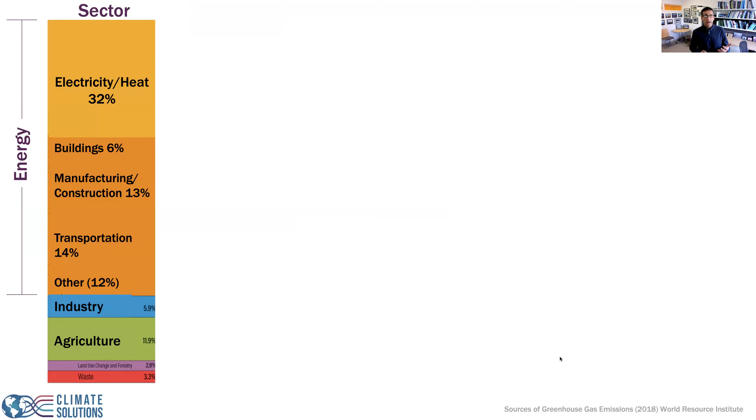So let's start again with this framing diagram that's been in both sections of this series. What I'm showing you here are the sources of greenhouse gases to the atmosphere that are causing climate change. What you can see is that our production of energy writ large is about 75% of all the problem. That diagram then flows through to where this energy is being used.

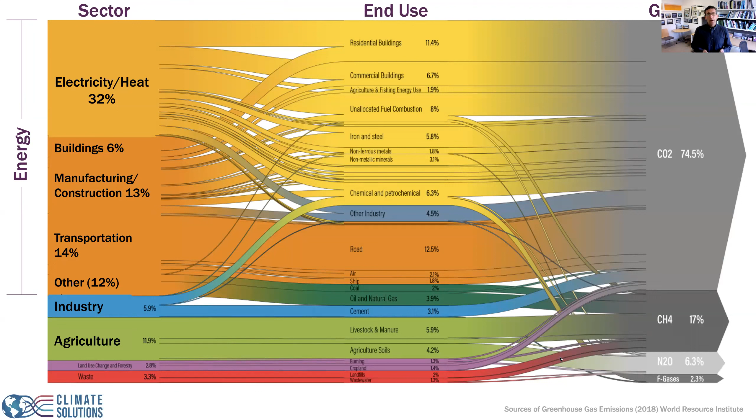So in residential buildings, in commercial buildings, in agriculture, in road transportation, et cetera. And then out the right-hand side of the diagram tells you which greenhouse gas is being produced, and together those are causing climate change.

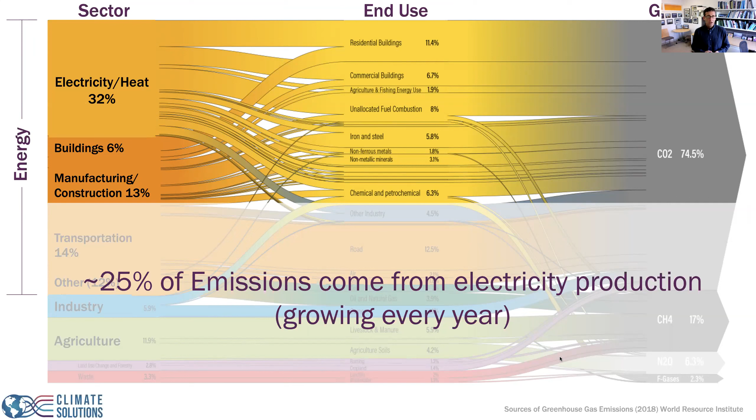The bottom line from this diagram for today's talk is that roughly a quarter of emissions come from electricity production. When I first recorded these videos, electricity was the biggest emitter. Of course, right after I recorded them, transportation came in slightly ahead of electricity in 2022, but it doesn't really matter for the talk because transportation will soon be part of the electricity sector as we electrify our vehicle fleet, and we'll talk about that in just a minute. So electricity is a huge producer of greenhouse gases.

And the reason for that is that we produce electricity mostly by burning coal and natural gas. So fossil fuels make up roughly a little over 60% of the total electricity mix. And non-emitting sources, which include nuclear fission, very prominent in some countries and not in others, hydropower, wind, solar, and other renewables, make up the other roughly third of electricity production.

There are a couple other things I want to highlight about this image before I move on. The first is that in the year 2000, fossil fuels made up 64.8% of electricity production, and 20 years later, they make up 63.3%. So just over a 1.5% drop.

Now, the total amount of electricity production has gone up. Renewables have really come on board in great numbers, but as a percentage, we're still using mostly two-thirds fossil fuels to generate our electricity. Despite all the press about how fast renewables are coming online, as a percentage it really hasn't changed very much at all. If you look at low carbon sources, it's gone up about 1.5%, essentially.

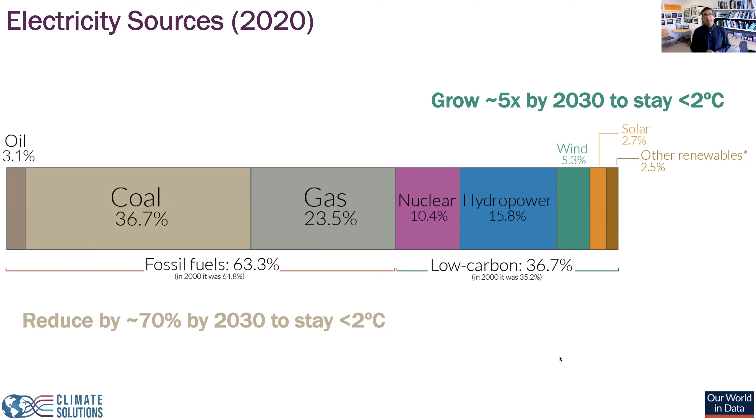Nonetheless, if your goal is to stay below 2 degrees Celsius, what has to happen? In order to stay below 2 degrees Celsius temperature rise, we need to reduce our use of coal, oil, and gas in the electricity sector by about 70% in the next 7 years. And we need to grow the share of renewables, or non-emitting sources of electricity, by about 5-fold in the next 7 years.

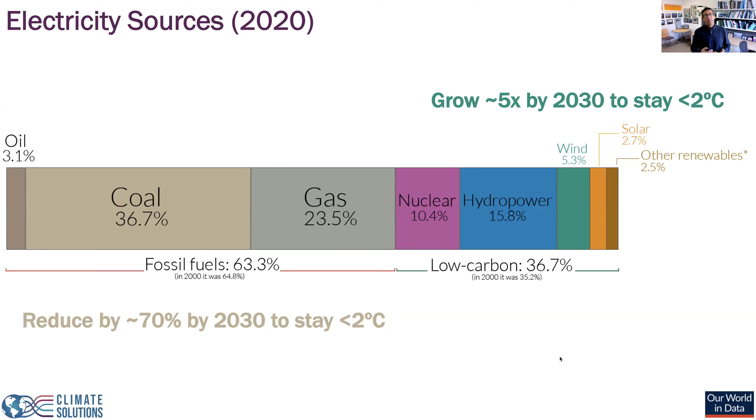So this is no small challenge, and one that we are racing to achieve, because 2 degrees, that trajectory, is at the outer bounds of what is readily imaginable in terms of a climate future. Any warming beyond that really starts to become much more uncertain in terms of the impacts, because they grow so much bigger.

If we continue to emit at current rates for the next decade, 1.5 degrees Celsius will be in the rearview mirror, and 2 degrees Celsius will be very hard to stay below.

This is important for electricity, because even if we just run our current and planned electric facilities to the end of their planned lifetime, we will emit more CO2 than we can afford if we want to stay below 1.5 degrees Celsius. So what I'm showing you here is a time series going out from 2018 to 2070. The purple blob shows the total emissions expected to come from current electric plants worldwide.

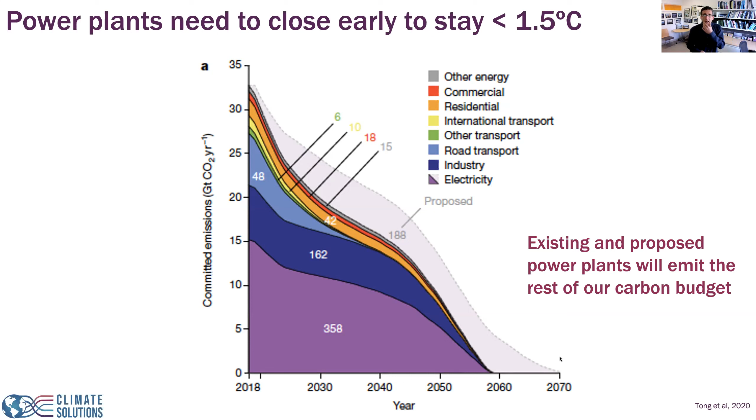There are still almost 800 million people in the world who don't have access even to that level of electricity. So at the same time as we're trying to decarbonize the grid, we also need to increase the amount of electricity we're producing if we hope to build an equitable future for all people on Earth, not just those wealthy enough or living in a country that has access to steady electricity.

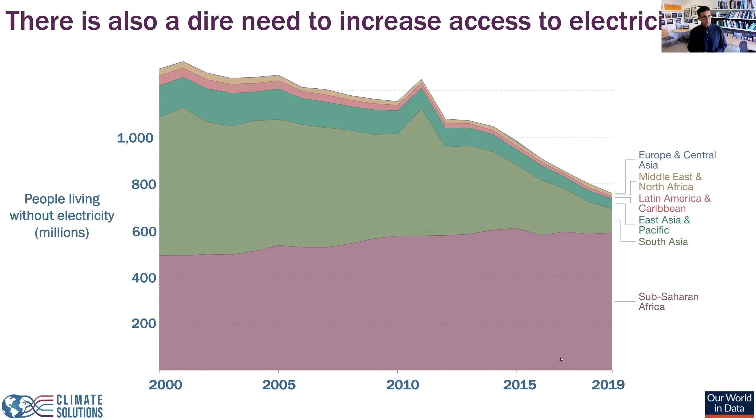For all of those reasons, zero emissions electricity is likely the single most important step we can take, and we need to take it rapidly in the next several years. It's not decades anymore, it's several years.

You can think of it as a radial network: you have a generator, spreading out to everybody in a single direction. As Dr. Rajagopal talked about in his talks, that's got to change.

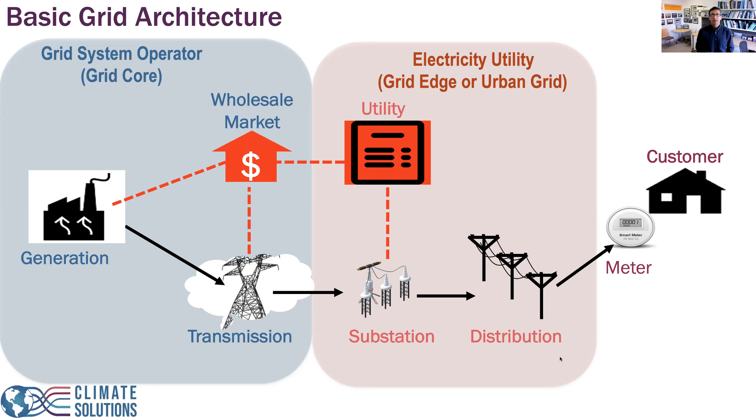That's going to change. One of the things that's going to happen on the left-hand side of the diagram is that we continue to integrate more renewables like wind and solar, and begin integrating batteries into the transmission network. But wind and solar, at least without batteries, don't produce when you want them to—they produce when the wind is blowing or the sun is shining. That poses a challenge of intermittency.

On the consumer side, we're actually going to see a really big increase in electricity consumption. I'll talk a lot about that in the last part of this talk as we introduce electric cars and other changes. But in addition, as people put solar panels on their houses, you have the ability to feed electricity back into the grid.

Instead of having one-directional flow from a power plant to the house, now you have bidirectional flow, which causes engineering challenges but also market challenges to the utility and generators trying to make money selling electricity. Dr. Rajagopal talked a lot about that.

I just wanted to highlight that this 21st century grid is still evolving—our idea of it is still evolving. For 70 years, we have invested very heavily in a stable, reliable grid that goes from power plants to houses.

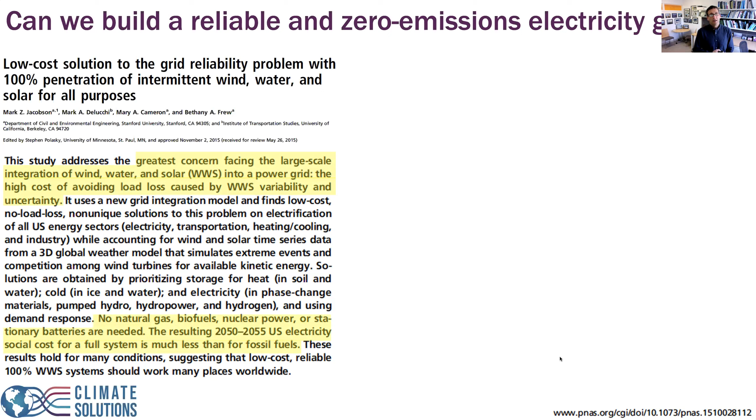Now, in response to that article, another group of scholars wrote a response, and their basic argument was, no, you're all wrong. In this paper, we find significant shortcomings, and we point to this work using invalid modeling tools, modeling errors, et cetera, and that policymakers should treat with caution any visions of rapid, reliable, low-cost transition to an entire energy system that relies almost exclusively on wind and solar. So you can see that the science is not yet settled.

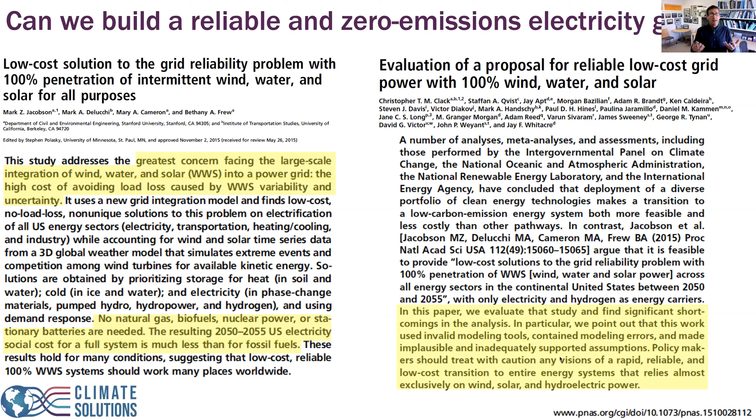Nonetheless, the first group published a paper more recently in Joule, arguing that not only could we do this in the United States, but they mapped out 100% clean and renewable wind, water and sunlight for all sectors of energy for 139 countries in the world. And they argued that that would create 52 million jobs, which is more than the jobs lost. They chose to break out how they were going to do it: residential rooftop solar plants, et cetera. I actually am not expert enough in this area to take a side in this argument.

And so I'm actually going to go on in a slightly different way and argue that it doesn't really matter in the short term whether we can run off 100% renewables. It matters that we rapidly increase the amount of renewables on the grid to buy ourselves time to figure this out. I'm a great believer in human ingenuity.

I think if we set our minds to it, we can figure out how to do this. We don't have to do it tomorrow. Remember, the amount of renewables as a percentage of electricity generation has gone up only by 1.5% since the year 2000. We can go a lot further than that before we have to worry about whether it's going to be 100% or 80% or 90%. So for the rest of this time I have, about another 10 minutes before I open it up to questions, I want to talk about that.

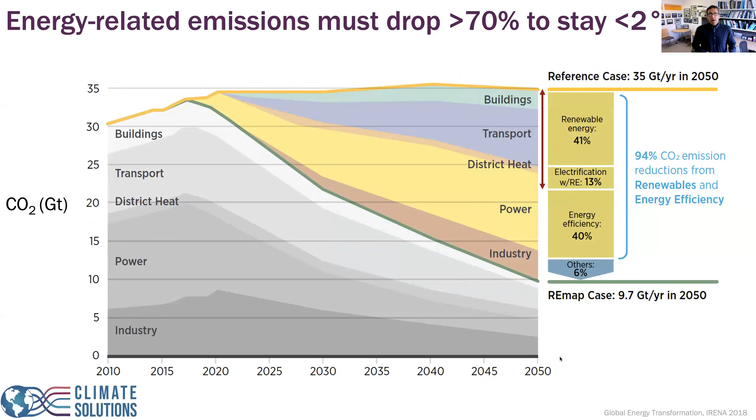I'm going to skip this slide and come to a point I want to make for the last 10 minutes. In addition to the challenges of renewables and grid storage, reducing emissions will require a massive increase in electricity use, paradoxically. I want to walk you through some numbers as to why that's so, and give you a very personal example from my own life.

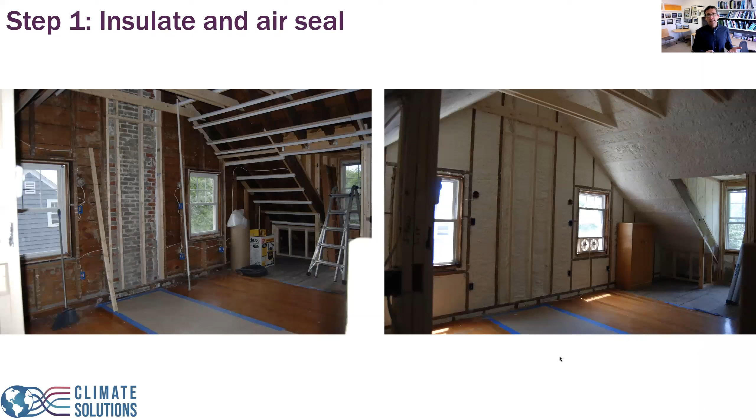We insulated the house well enough on the outside and the inside so that we could take the next step, which was to actually eliminate oil combustion from our house altogether.

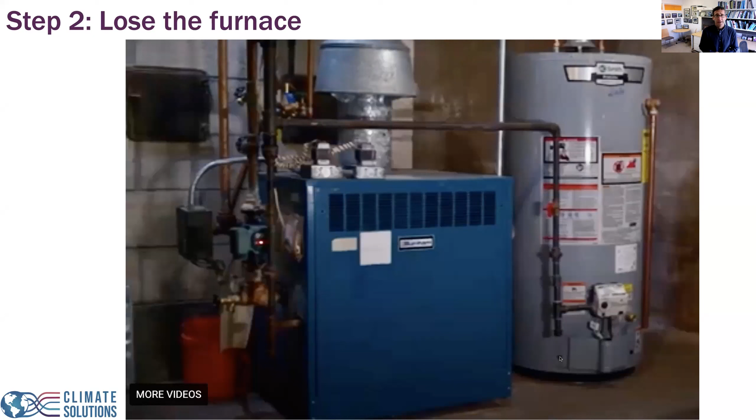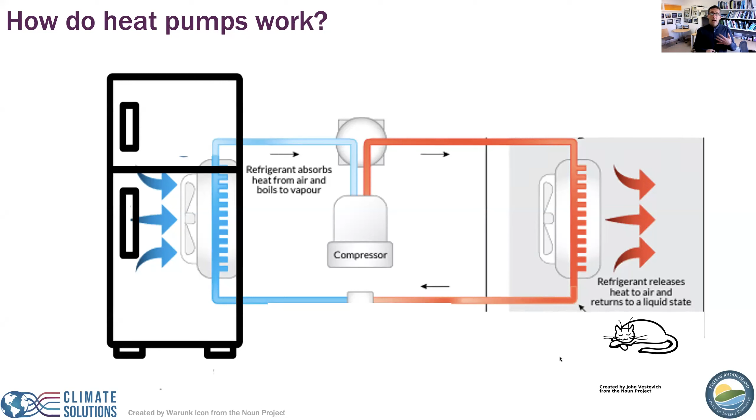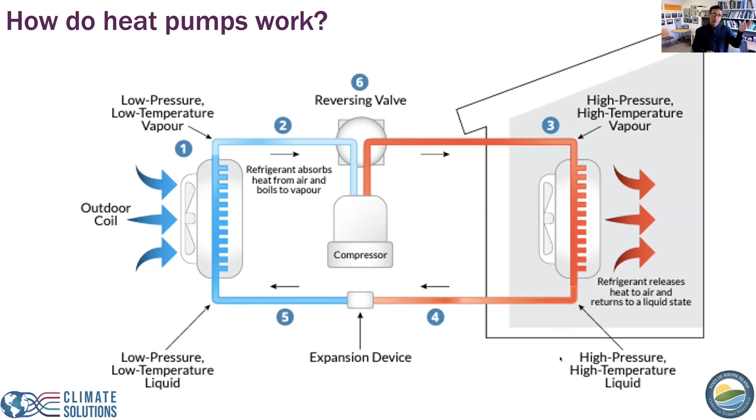My heat pump that heats my house, or if you have one, does the exact same thing, just in the opposite direction. Instead of taking heat from the cold fridge and making the kitchen warmer, it's taking heat from the outdoor air, making the outdoor air a little colder, and moving that into the house to make it warmer. So the bottom line is: you have a compressor outside, a vent inside, and you're using electricity to move heat from one place to the other.

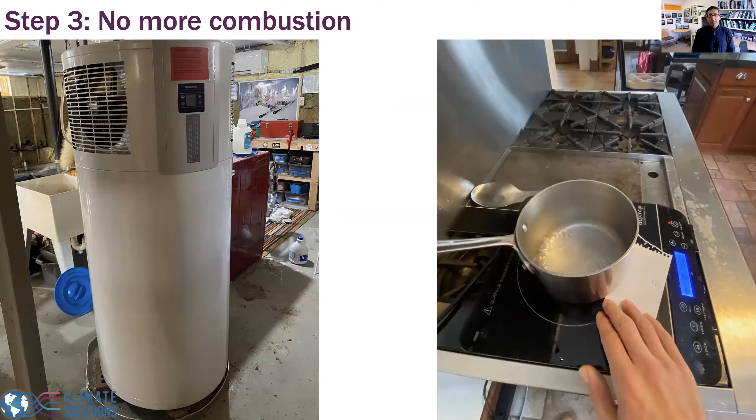We also replaced our hot water heater with a heat pump and switched to an induction burner. I'm not going to talk a lot about that in the interest of time, but let's now see how our post-renovation house does from a climate perspective.

On the left is the old house, on the right is the new house. We were burning about 866 gallons of oil per year to heat the house. Of course, we're not burning any oil anymore—we've ripped out our furnace. We were using about 3,400 kilowatt hours of electricity per year to run our fridge, lights, TV, dehumidifier in the basement, whatever. And because we switched from oil to electric heat pumps, our electricity use went up—you can see a roughly threefold increase.

But now let's look at the emissions from the house. When we had oil and electric, we were emitting close to 10 tons of CO2 per year. Our all-electric heat pump system is emitting closer to 2.3. If we had had natural gas, it would have been intermediate, but all-electric heat pumps are way better. That's a 75% reduction in our emissions, even as we increased our electricity use.

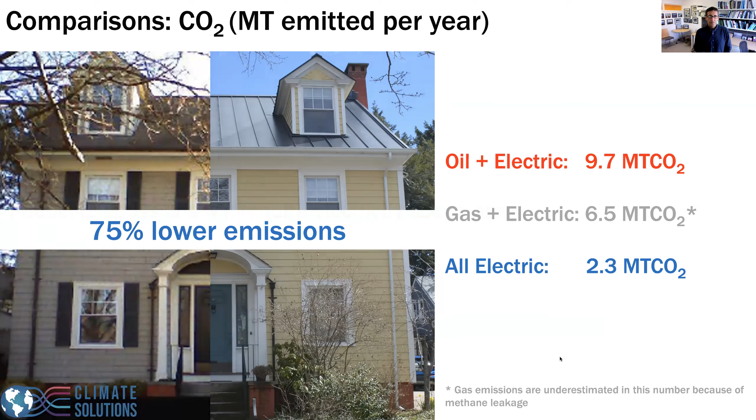So reducing emissions will require electricity use to rise. I'm going to give you a second example from the transportation sector, again a personal example.

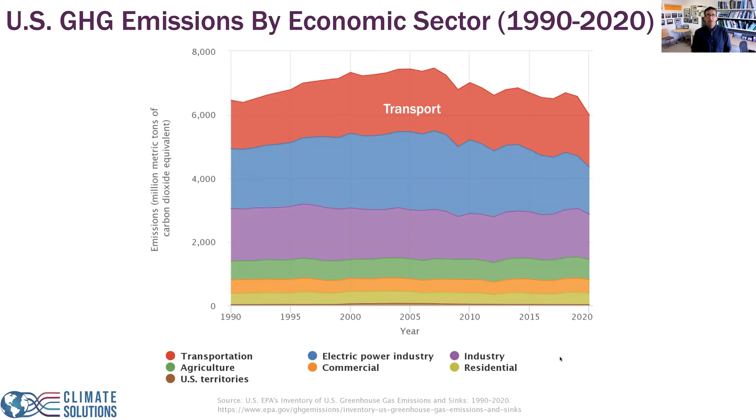A gas car, on average in the US, gets about 25 miles per gallon. We were driving, between my wife and I, about 15,000 miles per year. So that's 600 gallons of gasoline per year, which is about 5.3 metric tons of CO2.

An electric car, in general, gets about 4 miles per kilowatt hour—that's been our experience over the course of 2 full years now. Keeping the same 15,000 miles per year, that's 3,700 kilowatt hours. If you calculate how much emissions it takes at the power plant to produce that amount of electricity, it's a little less than 1 ton a year of emissions. That's even counting the power plant emissions—there's of course no emissions coming out of the tailpipe of an electric car, because there is no tailpipe.

So now let's do a full comparison of the house with the cars: 866 gallons of oil to no gallons of oil. 600 gallons of gasoline per year to no gallons of gasoline per year. 3,400 kilowatt hours a year bumped up to 13,000 kilowatt hours per year. So way more electricity, not surprisingly, but emissions dropping by almost 80%.

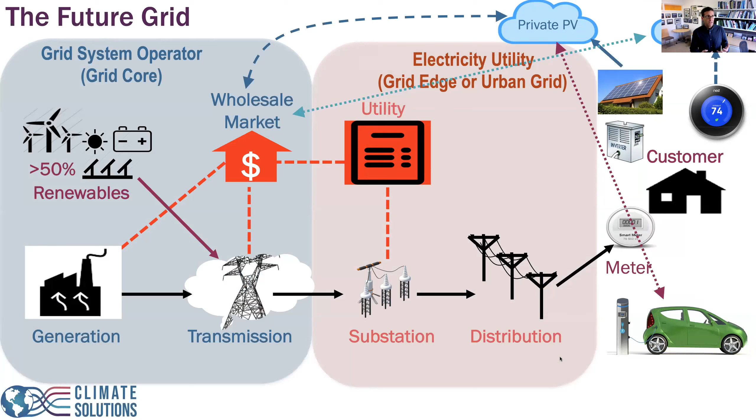The bottom line here is we have increased our electricity use by roughly 400%, but we've decreased our emissions by 80%. The point I want to make is that while we figure out the engineering of how to transition the electricity grid from what it was to what it's going to be—with deep penetration of renewables, electric cars, increases of demand, all the things we're working hard as a society to build out and figure out—we don't have to wait. We can make changes right now that will reduce our emissions dramatically. In our case, with our house and our car, almost 80%, right?

While we figure out how to run our grid off renewables, we don't need the answer to that question instantly. We can make an enormous amount of progress in many sectors, not just home heating and transportation. And that is the transition we also need to start right now. That doesn't mean we're off the hook—we still need to transition to renewables.

We still need that rapid build out, but there's a lot we can do other than that. And I would encourage you, as you think about your own footprint, your own neighborhood, your own neighbors and your own family, to think about the things that you can do. And the 2 most important things you can do are electrify and then electrify. And then the 3rd most important thing is electrify. And after that, we can continue the conversation about the transition to 100% renewables and how quickly that can get done. So I think I'll stop there with the presentation.

I hope that I see there's a bunch of questions in the Q&A, so that's great. I'm going to stop my share and let Allison moderate the questions, and I'll do my best to answer them. So thank you for your attention.